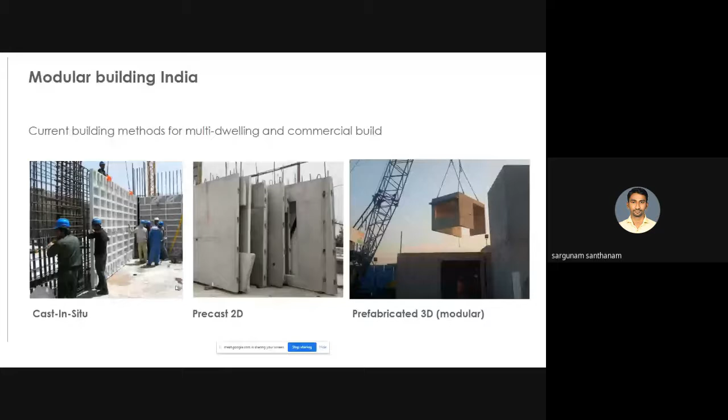And not only precast elements like columns and beams, but also MEP we are trying to do, and in many advanced countries they are planning to do this. They make the entire shaft into a precast in the factory itself, and then just do the erection at the site level alone. This also gives us a lot more advantage at the site level, like time saving, cost reduction, and the main thing is manpower. We can use skilled manpower in the factory and just assemble it at the site itself.

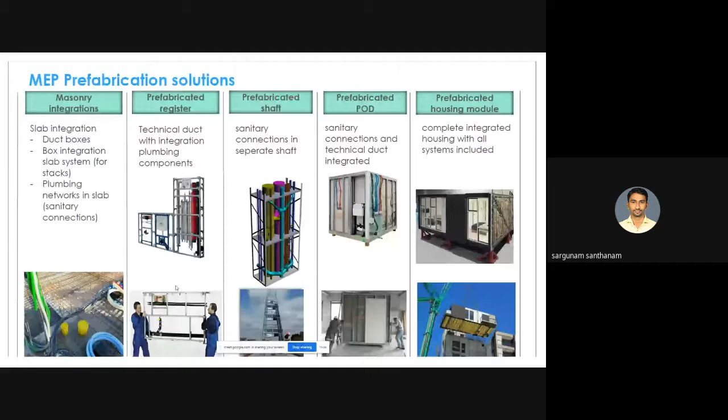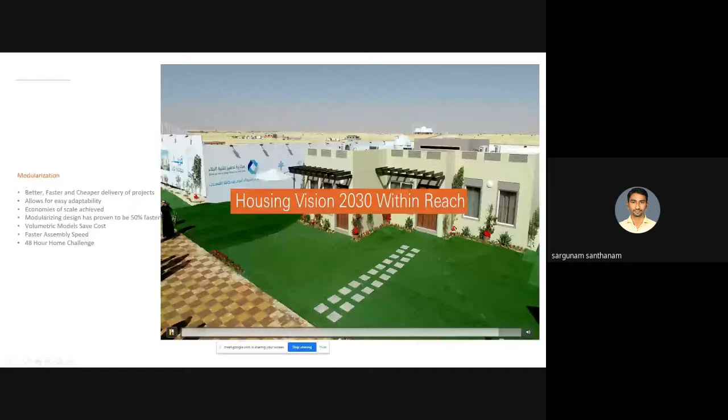So this is a vision for Gulf country. This is also a government project which we are currently doing in the Gulf area, across Saudi Arabia, in Mecca, Medina, all over GCC countries. We have just been awarded 4,000 villas for construction for this government project.

Each villa, you can see, within 48 hours we have just assembled here. Construction time is different - the entire construction will be done in the site factory, and we just do the assembly at the site level. This type of construction is precast with volumetric construction. As I said before, precast is an advanced construction type. Only the volumetric box will be assembled on site, and we do finishing items like wiring. Most of the elements will be made in the factory itself.

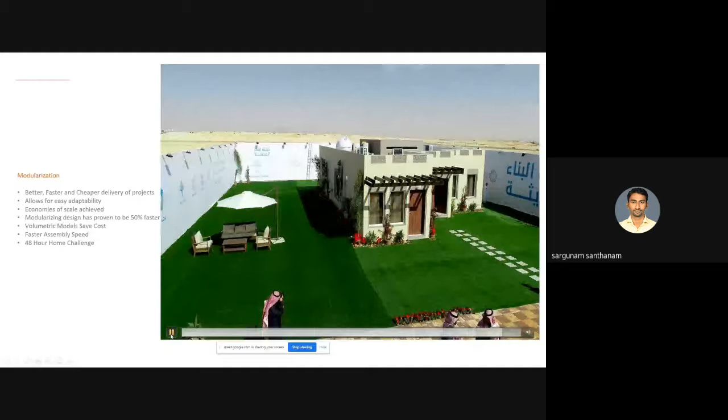Now I can show you a case study of a hospital building which we did in India. This is a ground plus 5 core configuration building. Here you can see the sequence from starting till end of how we are planning these precast projects.

This is the first stage of a precast building, starting from the column, precast column. The footing will be made up of CIP elements, so it will be like a regular conventional building for the footing. From the footing, our precast elements start - starting from the column, then the beam will be there.

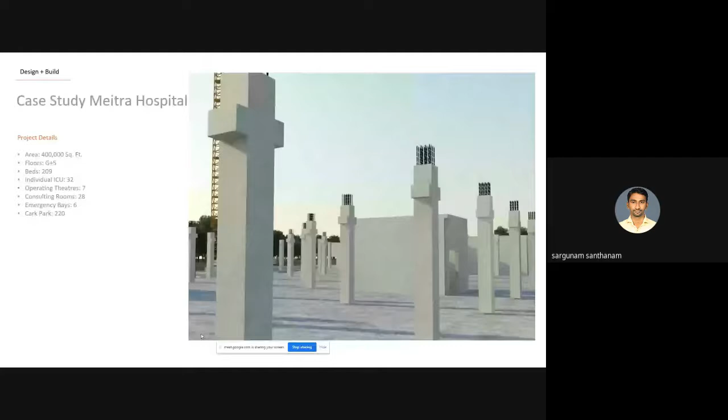After the column and beam, we will erect the beam. And these are all the parts.

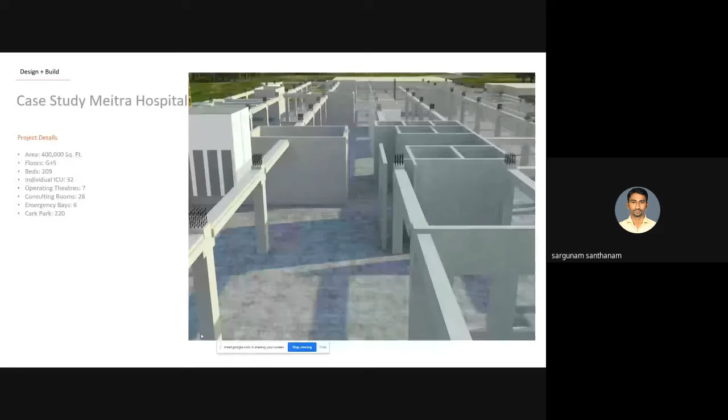So you can see here we made the MEP as precast elements. The MEP is also made entirely in the factory, and we just assemble it inside.

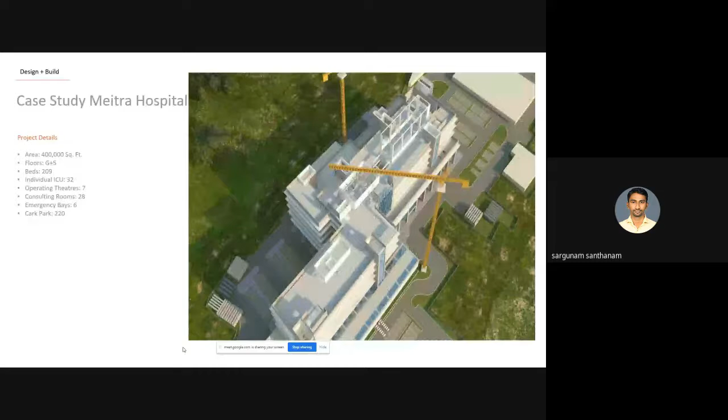So one of the main disadvantages of precast is the joints, wherever we have wet connections, and we have joints at the slabs, and even in the beams you will get some joints. Those joints should be treated very properly so that in future there should not be any leakages, water leakages - it should not be there. So that is the main care we need to take in precast construction technology.

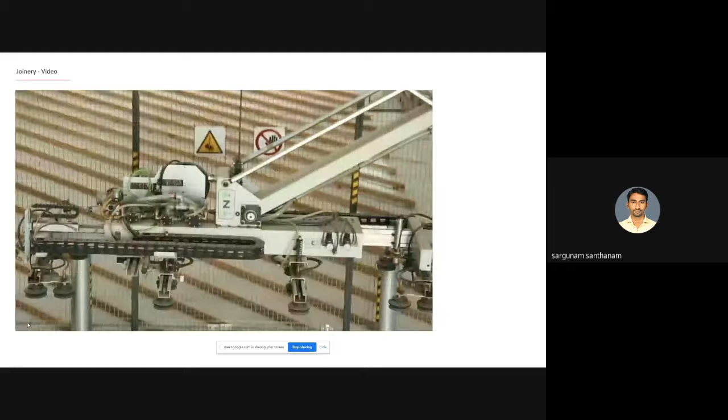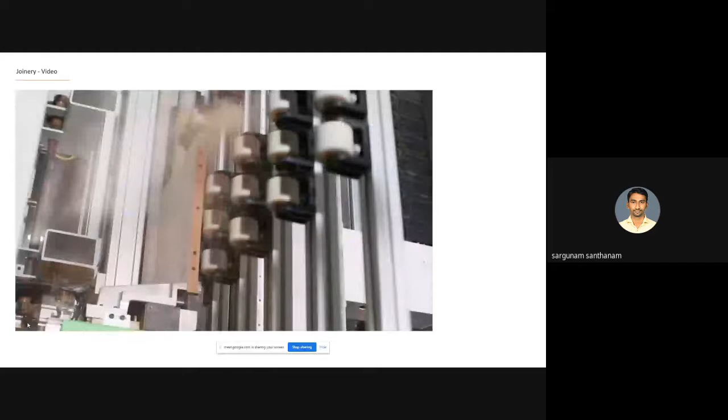You can see there are a lot of robots which we are using, which are all imported from Germany and other foreign countries. We have reduced the manpower, man force, in the entire spectrum. You can see these are the joinery products. Whatever projects we take, starting from execution till handing over, we do the entire spectrum. Entirely we take design and build projects, mostly, for the projects.

So you can see these are all the bathroom pods, including all the fixtures, wirings - entirely done in the factory itself. You can see here the lifting hook. With the help of this lifting hook, we will just lift it and do the erection at the site.

So only these doors will be balance items - these doors will be fixed at the site level. And you can see here, these are the tie rods. These rods will be anchored into the existing slab at the site, and we will do the concreting so that there won't be any movement of these pods in the future.

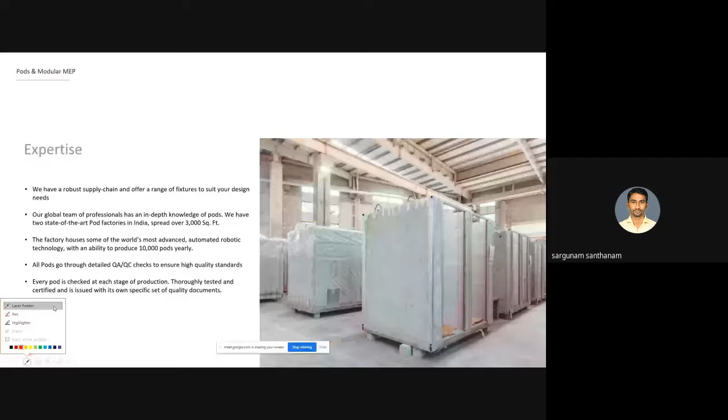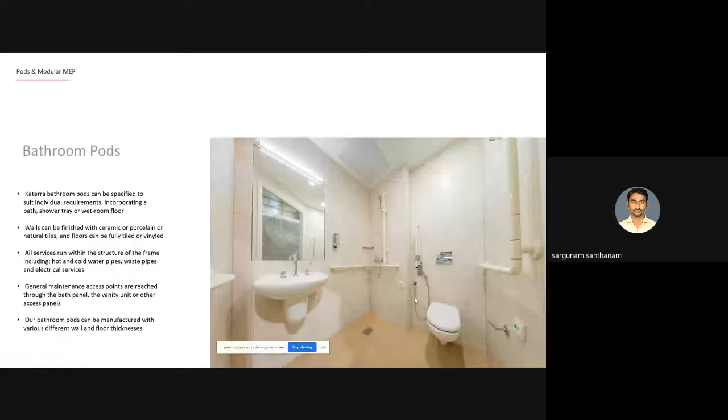So you can see the interior of this pod, including all these fixings and waterproofing, entirely done in the factory itself. These are the shaft samples which we did in the pod itself. But most of the time now we are going with the conventional type, since there will be some errors on site, so we have planned the erection of the shafts in the site execution only.

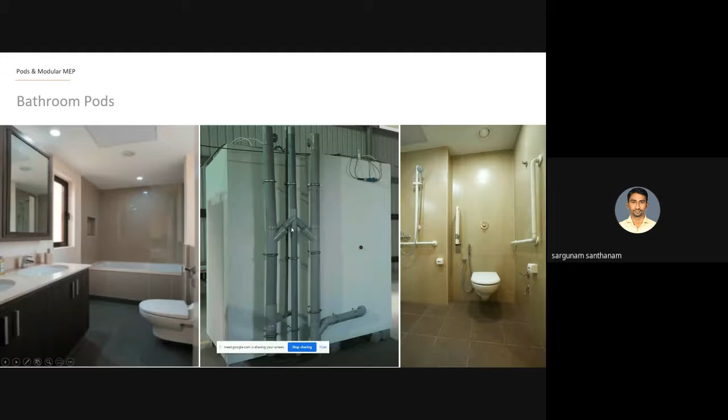So not only bathroom pods, even hotel pods or kitchen pods, anything can be made in the factory itself. So these are for hotels, including these carpet fixtures, wallpaper, ceilings, entirely made in the factory itself.

So just to give you some brief about conventional and precast construction, here I have made a table for easy understanding. Starting from project completion till handing over, I have mentioned the disadvantages and advantages. Starting with timelines, we can say 35 to 40% time savings we can make, as I said earlier.

Then for structural durability, we start from concrete grade M40, which is the minimum grade we use in precast concrete technology. But in regular conventional construction we use from M20 also, and for slabs maximum we go with M30 only. But here we go till M60, and even M80 we have achieved, depending upon the project designs and specifications.

And for maintenance, a regular conventional building definitely requires it. Here it is negligible, because if you do proper curing in the factory and all the regular QC checks have been done, maintenance will be very less compared to conventional buildings. And plastering is not required for precast products, any column, beam, or slab. Everything will be smooth finished in the factory itself, so there is no requirement of plastering.

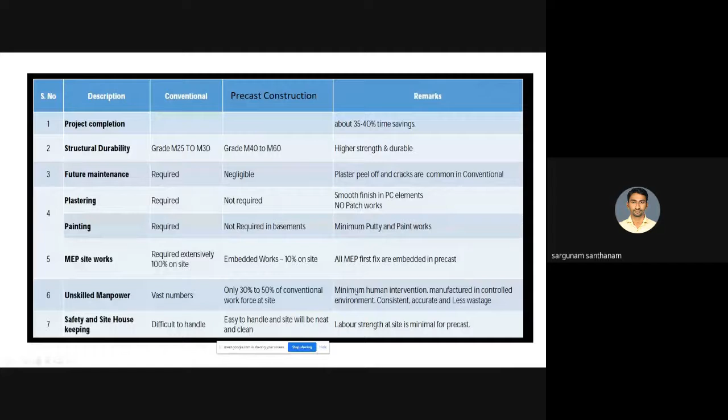I can show you some more project videos of how we did it. This is Lulu Mall in Lucknow. So here we are also using technology like BIM 3D models for all the projects, so that errors can be reduced to negligible.

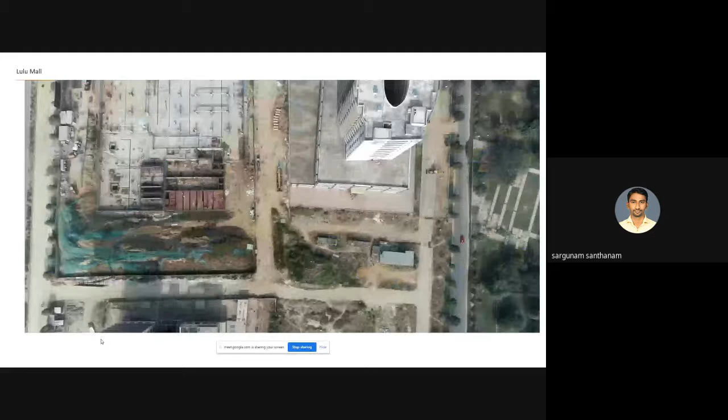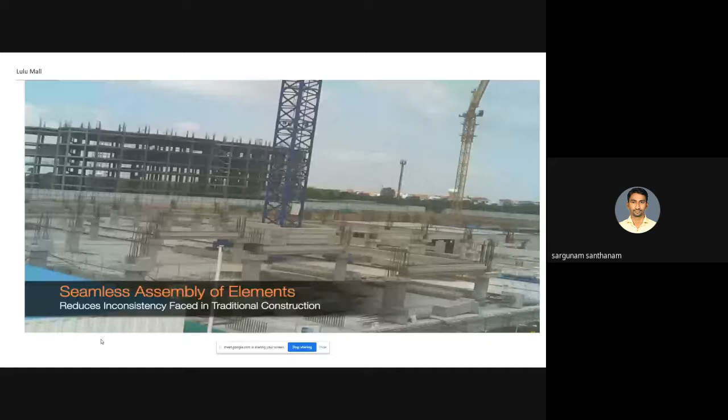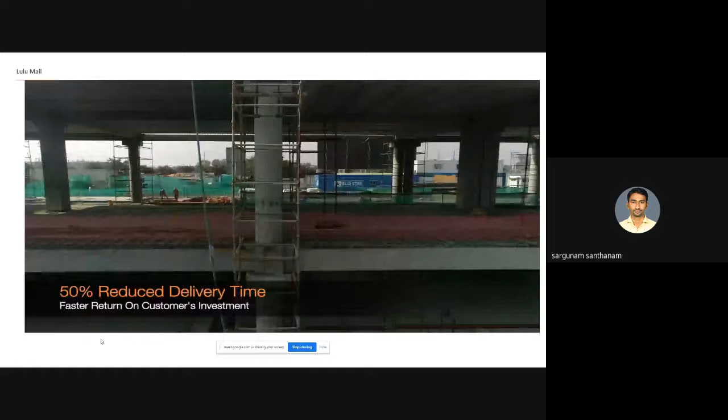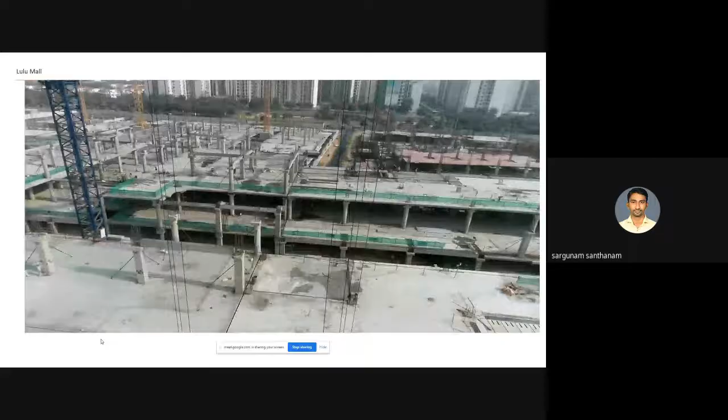So this is one of the Lulu shopping malls. It's in Kerala, actually.

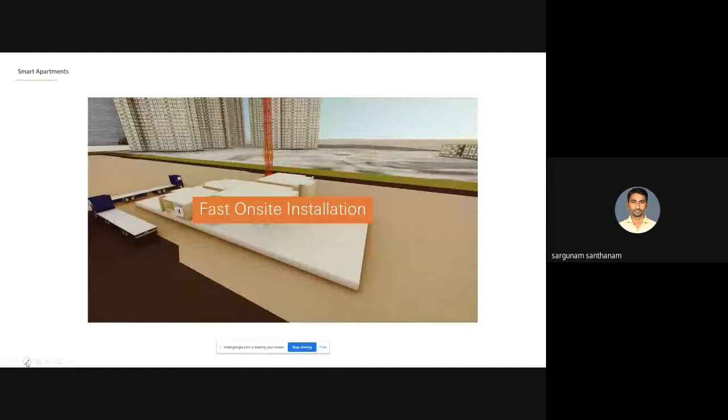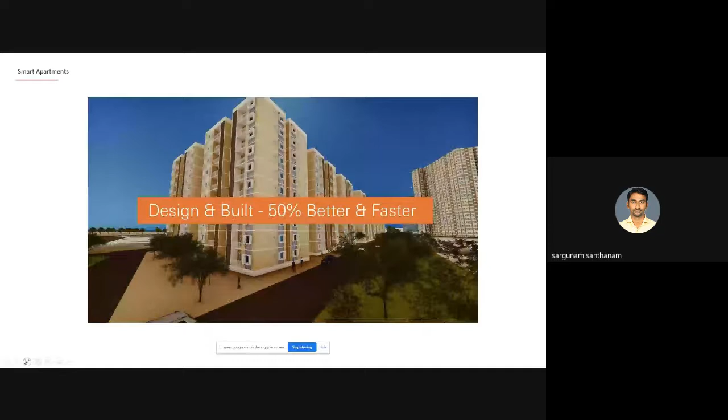So this we are proposing for government projects across pan India. The designs and everything are done by our team, and the only thing the government needs to give us is land for construction of this type of project in a very fast manner.

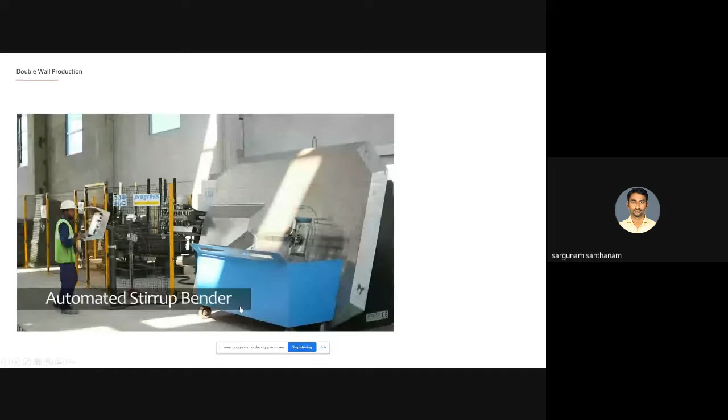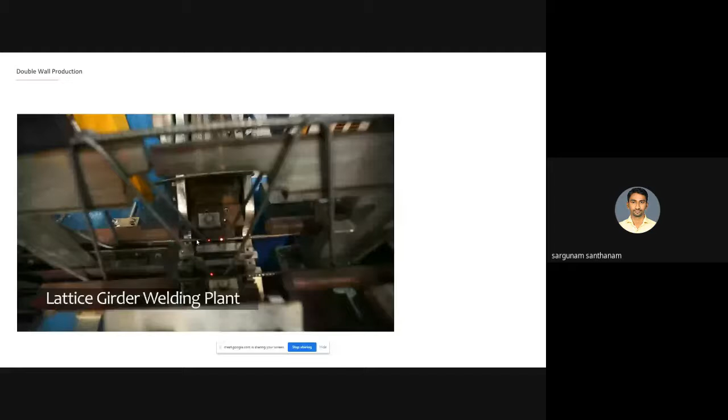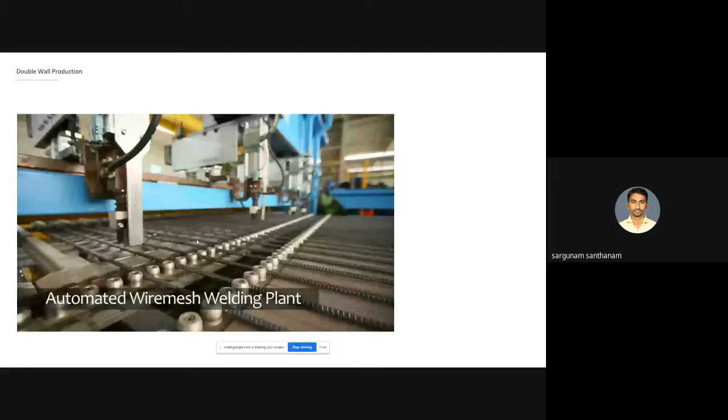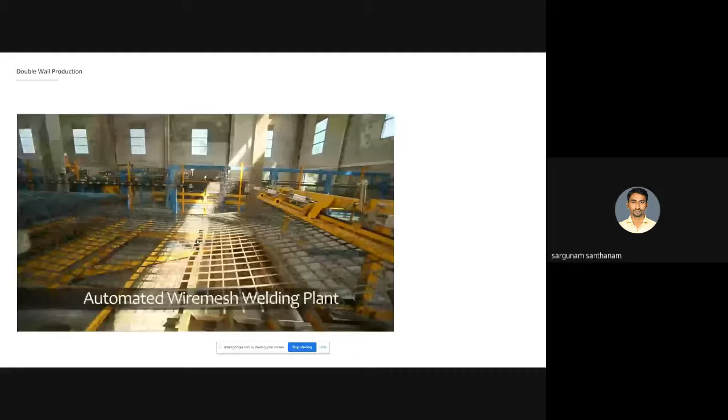And there's the creation of mesh. Maximum it will be 150 mm center to center spacing. So after this reinforcement, it will be laid on the tilting table.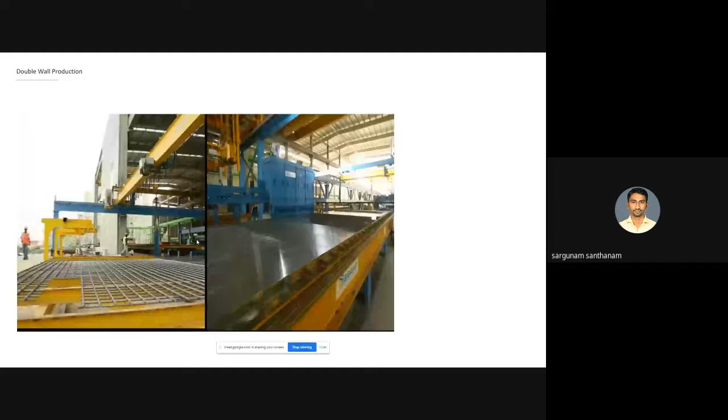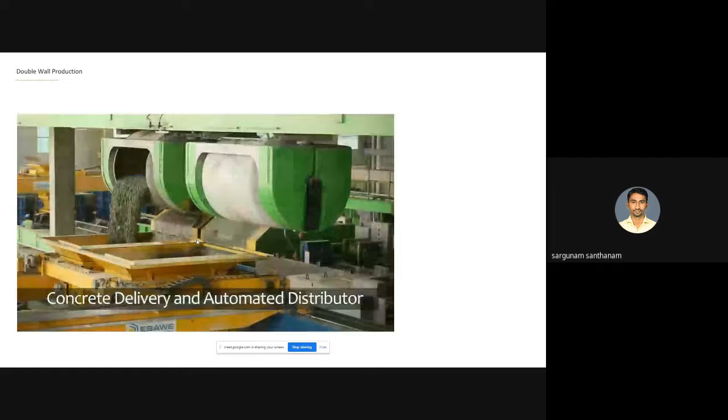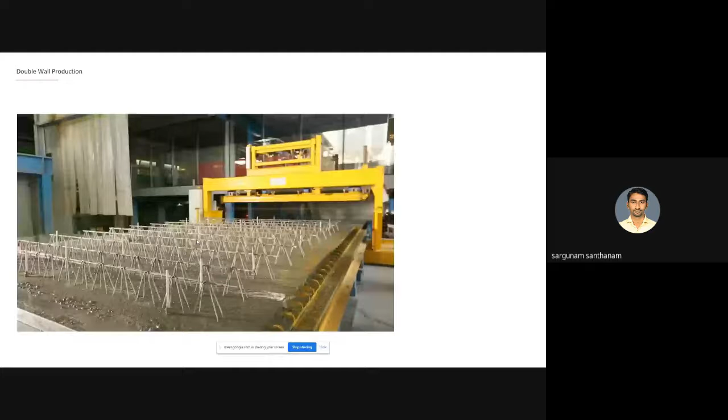So once this one layer is cured, then we will just tilt the table. So after curing, we are doing only steam curing in the factory.

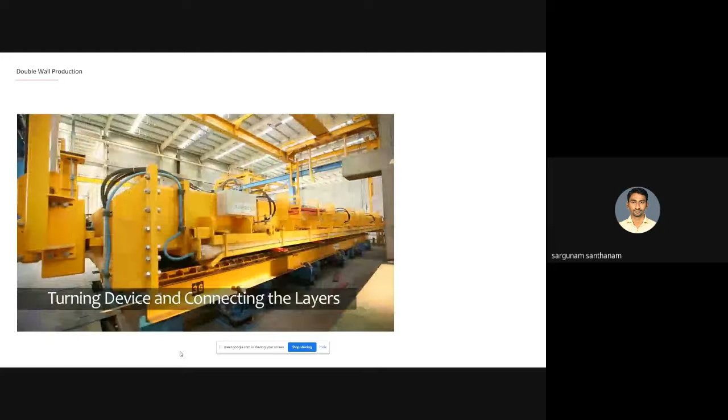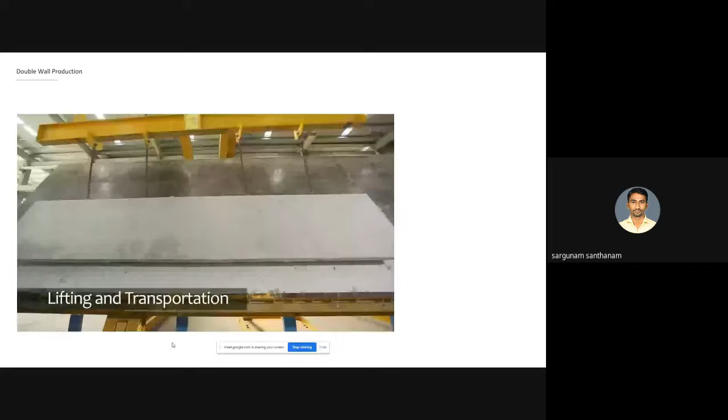So these double walls will be mostly with the load bearing walls only. These double walls will take the load. So mostly, starting from 150 mm thick till 500 mm thickness, we can make this double wall. So you can see this hollow space. This infilling activity will be done at the site level. So I can say the wet connection activities and this infilling, then screeding, we have to do at the site itself.

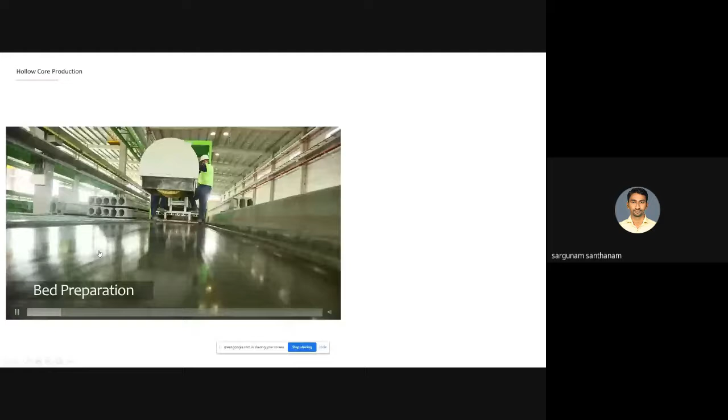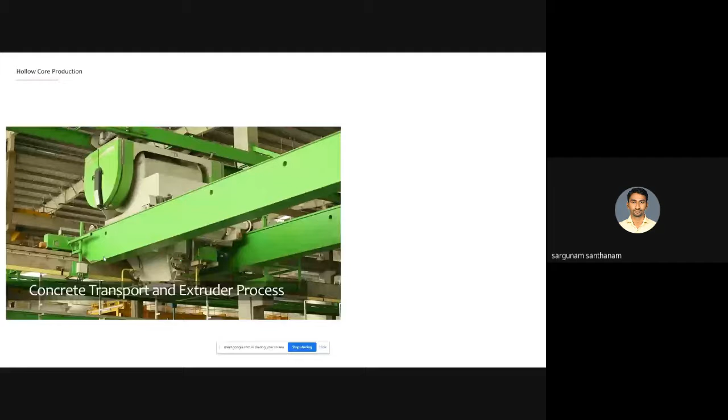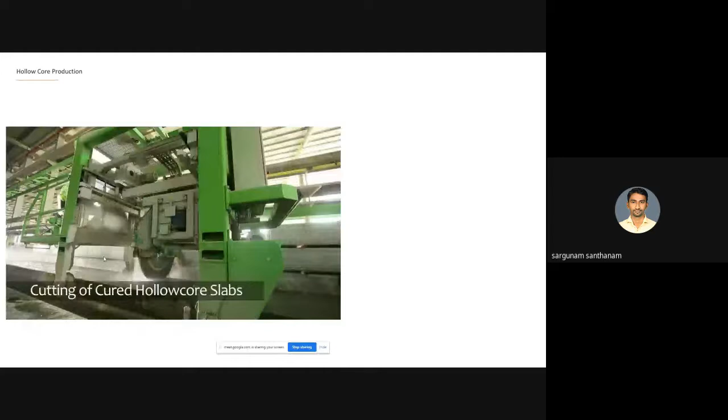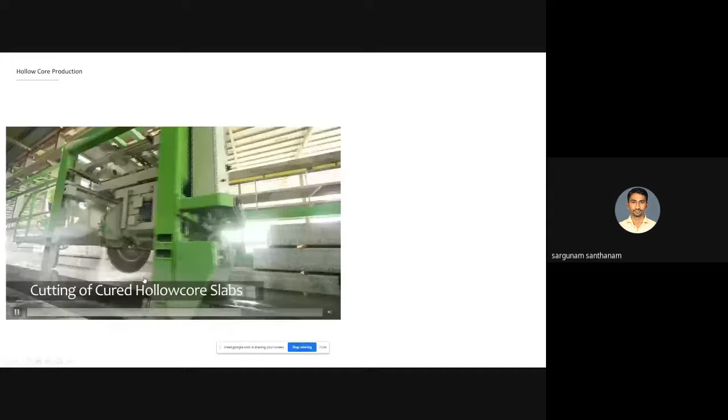For hollow core slab, this is a major item which we are using in all precast projects. So this is how we start the preparation of the bed. Maximum width of the hollow core slab will be 1.2, 1.5 meter. So whatever the required length of the span, we can just cut the hollow slabs. You can see here the end of this hollow core slab will be covered with an end cap, which is made up of plastic or PVC.

So at the site level, we'll just close this gap and we will do the erection. The length of the slabs may vary, depending upon the projects and the span length. And the thickness will start from 150 mm till 500 mm, based upon the design and load criteria. This is how hollow core slab will be produced. Apart from this, beams, columns, all these will be the regular shuttering and mold tables.